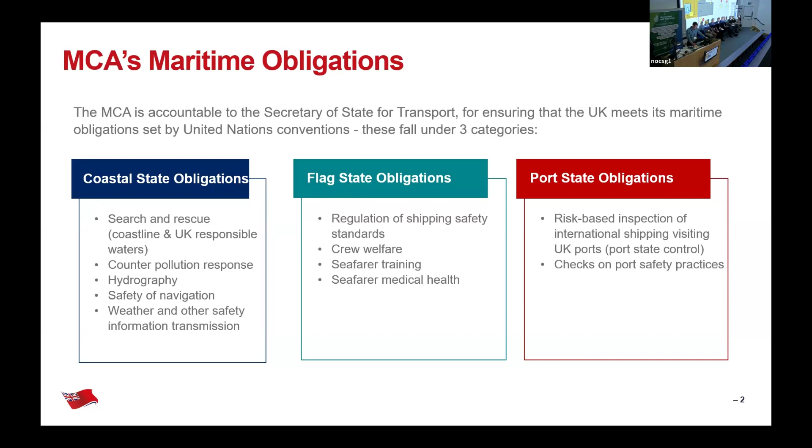So just to give an example, several organisations interplay whenever you're working at a port. And for example, we remain responsible basically for the vessel. So you can have bunkering from shore to ship, from truck to ship, ship to ship being particularly common. And if it's ship to ship, the MCA would be responsible for both ships, both the bunker barge and the ship. Otherwise, it'd be responsible, of course, just for the ship. And for any refueling from another ship to the port. And then interplaying with all the other port authorities as well.

So in terms of the vessel types and likely fuel options going forward, it very much is about embracing a multi-fuel future with no one fuel really working for everything. So things like ferries, aquaculture, workboats, inland and recreational vessels, limited range, and characterised particularly by having lots of recharging opportunity. That may well suit electrification. If you can electrify, you probably should. It's the most mature technology.

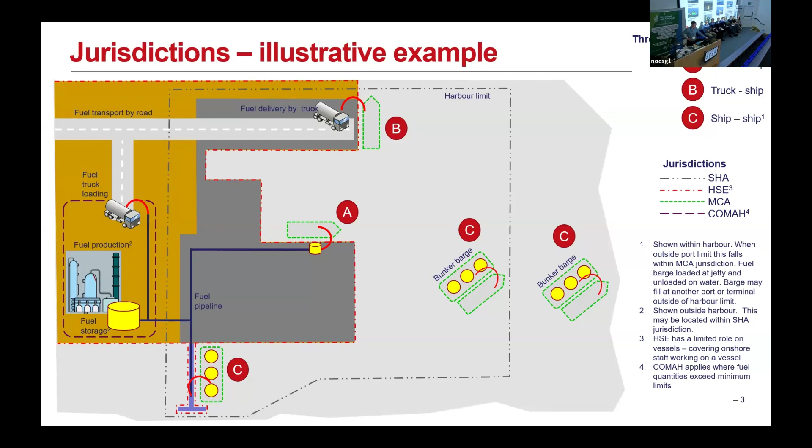It's relatively straightforward. So the offshore wind operation and maintenance fleet is also a bit of a unique case because they've got access to potential charging from the turbines. So basically taking electrification and then giving it a massive boost in effective range from being able to recharge out there, and then also accessing cheaper electricity.

And then for longer range domestic vessels, so things like longer range ferries or maybe crew transfer vessels that have longer range, that's when you might find yourself using compressed or liquid hydrogen. But most people think that compressed or liquid hydrogen will be restricted to smaller vessels because the challenges of doing hydrogen at scale are very large. The storage costs are extremely high, and it's very, very difficult to get a liquid hydrogen system to be even remotely leak-free.

At the international level, most signs are pointing towards methanol and ammonia in some mix, with methanol sort of being the preferred fuel, except for the fact that there's going to be real issues around scalability of methanol in terms of accessing a sustainable carbon atom. Pretty much all the predictions suggest that methanol would take by 2050 a 20 to 40% market share, and ammonia around 50 to 70%, with the rest made up of other things.

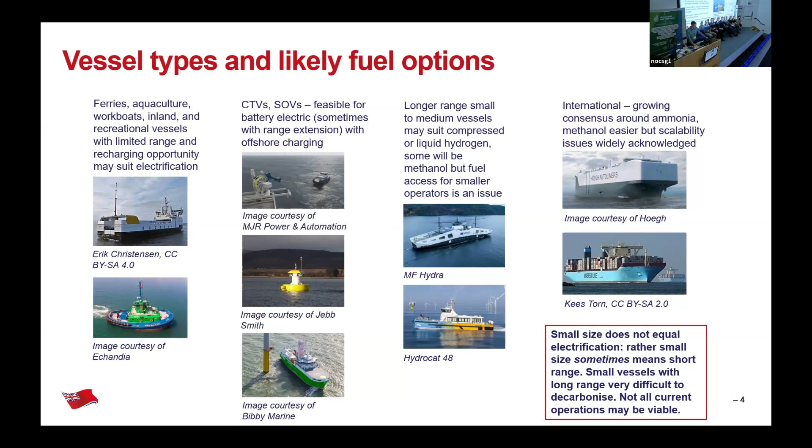So essentially, we need to prepare for all of these fuels in terms of how they might be released to the environment and how we deal with them. So hydrogen on board is flammable and explosive, but it does actually vent upwards and diffuses fast.

Now this slide, I keep meaning to update, and whenever I present this slide, I keep noticing the mistake.

But tank on top design is basically preferred at the moment. That's where the conversation is going. Having hydrogen below deck, even with the best explosion-proof venting, at the moment is tending towards being too unsafe. So Class have rules around hydrogen already. They're certain to evolve, and the MCA is going to develop those for coded vessels over the next few years.

So as I said, liquid hydrogen is considered by many as too difficult and too low energy density for the international, but there are some backers, some nations, some companies backing it, but they are the minority. So you need larger engines to work hydrogen, and if you can put a fuel cell on board, which is a lower power density form of propulsion, then that is a natural pairing.

So the UK does plan to be part of the European hydrogen backbone. That's industry plans rather than government plans. That will mean that we might be able to access piped hydrogen, which would be, once the pipeline is installed, the cheapest way of getting it around. We have a lot of UK hydrogen generation projects, thanks to DESNZ's 2030 hydrogen strategy. Most of these are blue hydrogen, taking reformed natural gas and sequestering the carbon dioxide afterwards.

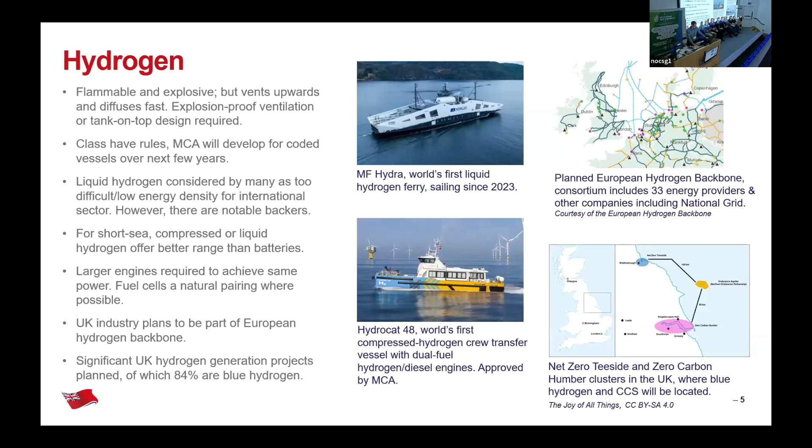So methanol, it's toxic on skin contact or if you ingest it. It burns with invisible flames, so you need special cameras to pick up fires and so forth. Because it's toxic to humans, you maintain a 600 mil exclusion zone around tanks before you get to any human occupied space. You also have double wall pipes and tank inerting and so on. The IMO have released interim guidance for its use as a fuel, but very much in development towards a final set of rules. And again, Class have developed rules for this.

Methanol is less aquatically toxic than conventional fuel by several orders of magnitude. So actually, you can store methanol in a single skin tank, where ordinarily you'd have a double bottom. So you can make use of that space on a retrofit. To burn methanol, you need 5% pilot fuel or some kind of combustion promoting additive to burn it in a

diesel engine. Methanol you'll see appearing probably on both small and large vessels, but again, the challenge of methanol is getting hold of it. Again, that sustainable carbon atom to get some kind of green or biomethanol. The infrastructure requirements are relatively straightforward, but are different to conventional fuels, and you need twice as much space to store it, and possibly twice as long to bunker, because you're bunkering twice the volume of fuel to get the same energy.

And generally, we try and caution people around choosing methanol because other people are choosing methanol. It needs to be linked into some kind of supply agreement. And that's where most of the successful projects are, because again, there's no guarantee this is going to be available at scale to transition a very serious chunk of the sector.

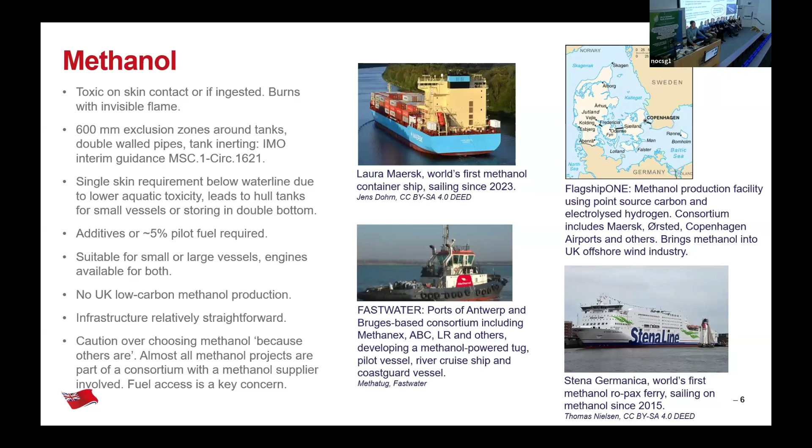So ammonia, obviously a gas at ambient conditions, highly toxic to humans in small quantities. It's not particularly explosive or flammable, not to be confused with ammonium nitrate, but it is very toxic to aquatic life. But then it breaks down quickly. So at the point of release into the water, it's our understanding that it would kill everything it touches, but it would break down quite quickly after that, and it wouldn't present a long-term risk.

Ammonia can be stored as a liquid at temperatures of just -33, which is a lot easier than -253 for liquid hydrogen. Our view is ammonia will probably predominantly be seen on international vessels. And the reason for that is you need high levels of containment and leak mitigation. And to get those in efficiently in the vessel and to actually fit them in at all, you're probably looking at quite a large vessel. Things like water curtains, highly trained crew, and so on.

There's no current UK low carbon ammonia production, but there are plans in place. Again, the reason you end up with ammonia rather than methanol is just this availability of that sustainable carbon atom. You can make ammonia just from water and air. So regulators and the IMO are actively working towards rules for safe implementation on ships. And there is an order book for ammonia. It's small, but it does exist.

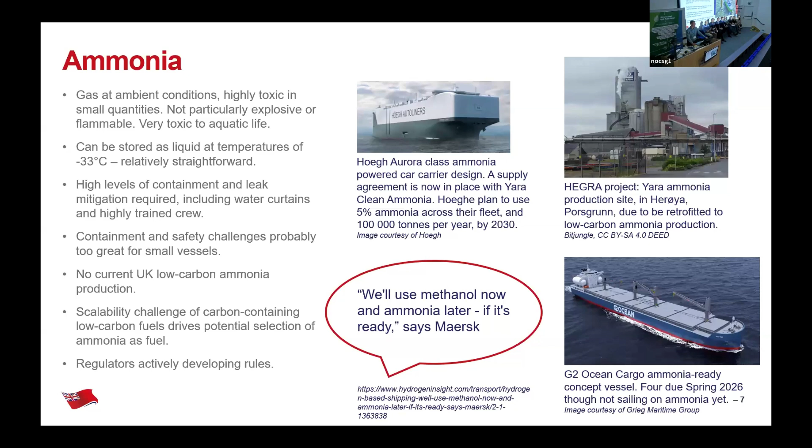So batteries still create lots of stir in the press. Generally, maritime battery installations are pretty safe. Nowadays, the rules are still evolving. DNV, for example, came out with a rule relatively recently that said you shouldn't store more than 5 MWh in one A60 enclosure. If you have more than that, there's a risk the enclosure won't hold if there's a full thermal runaway.

Lithium iron phosphate is made of more abundant materials and has a slightly better safety profile. And then lithium titanate is another alternative. It's more expensive, but the cycle life is very, very high. It's maybe 30,000 cycles instead of somewhere between 1 to 10,000 cycles, and could actually outlast the vessel. So in some cases, for very high cycle life vessels, it could be a cost-effective option. That's by far the most safe of these options as well.

You're not really going to see other types of battery like sodium emerging into the maritime sector because they have fundamentally lower energy density. And maritime is a demanding sector for energy density. So it's going to be lithium. And as I said, the rules are pretty mature. MCA's got Workboat Code 3, so anything under 24 meters that's a workboat can be coded, use us as a one-stop shop, and we now have prescriptive rules for how to use batteries on board.

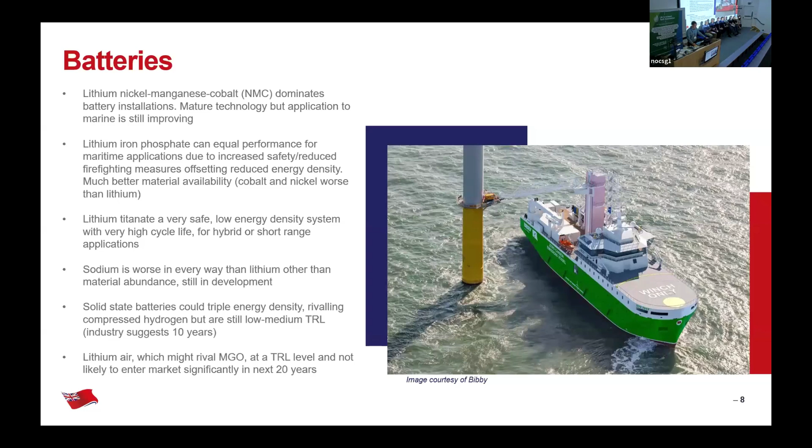And so biofuels, classed by generation typically. So first generation are made from edible crops, so directly compete with food. Second generation are made from waste products and do not compete with food, supposedly, but you do have to be quite careful with where you're tracking your supply chain. So both hydrotreated vegetable oil and fatty acid methyl ester, FAME, can be first or second generation. And in fact, FAME is commonly called UCOME, so used cooking oil, to specify that.

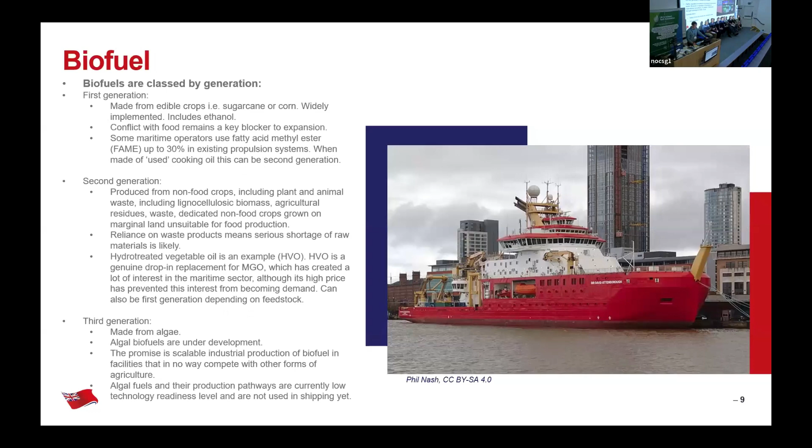And then finally, nuclear. So the maritime sector is focusing on small modular reactors. So 4 main options: light water reactors, fast neutron reactors, graphite moderated high temperature reactors, and various kinds of molten salt reactors. I'm just going to carry on talking like I can remember which each of those is. So obviously nuclear has got an extremely high cost associated with its development, as well as safety and security concerns.

I think nuclear is one of those things that we have to keep an open mind about, but in terms of its actual application on a civilian, commercial vessel, personally I think I'm going to believe it when I see it. But we do have an advanced nuclear fund to invest in next generation nuclear technologies, which would apply to both land use and maritime use.

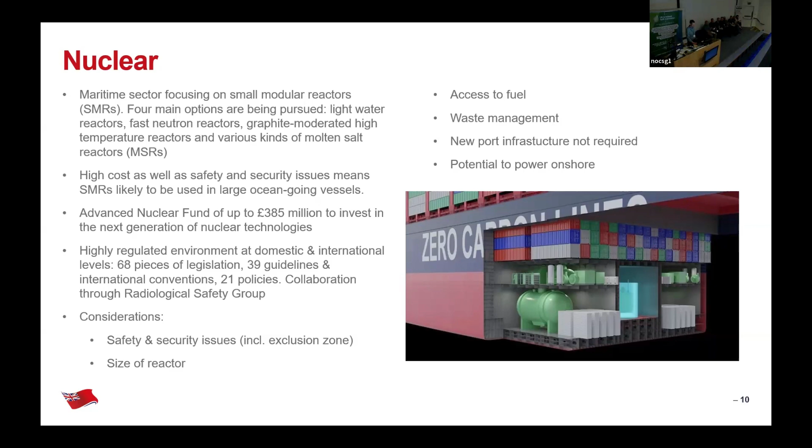It's a highly regulated environment. You're going to have to deal with a number of pieces of legislation, guidelines, and conventions, and multiple considerations on board: safety, security, exclusion zones, access to fuel, how you manage the waste, and so on. So that was an extremely rapid whiz through future fuels from the MCA's perspective.